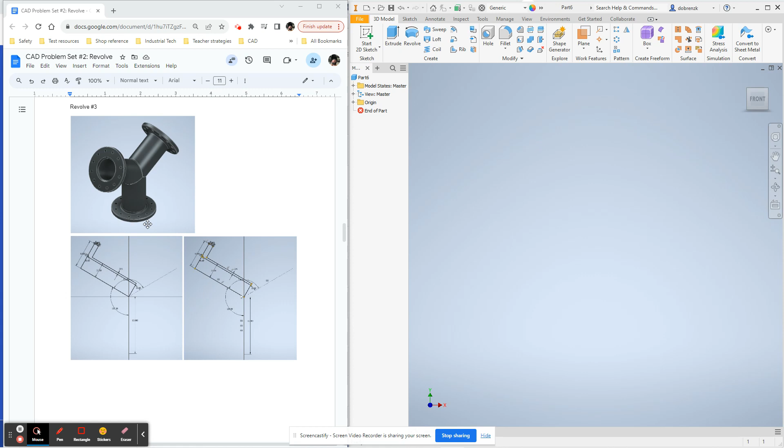This video is going to demonstrate how to create Revolve number 3 of problem set number 2, which, as you can see in the pictures on the screen here, is a 3-way pipe flange. Now we have several drawings of different sketching aspects. We have a circular pattern, some extrude cuts, another circular pattern of the 3D feature, and kind of a final

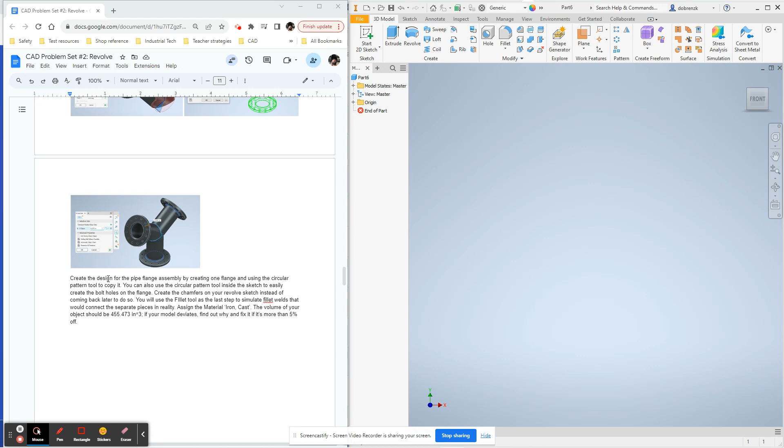fillet. Now, if we read the directions here, what we're instructed to do is create the pipe flange assembly by creating one flange and then using the circular pattern tool to copy it, which is pretty much what's shown over here. We are also to create chamfers on the Revolve sketch instead of coming back later to do so.

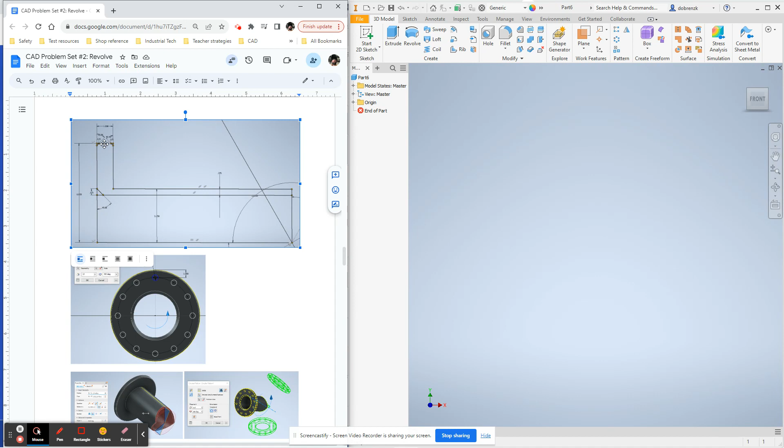So what does that mean? Let's see if we can find a better example. So here in this sketch, there is a chamfer on this face that we're going to integrate into the sketch instead of doing it later. And there's also chamfers on the corners of the flange as well. When we zoom in later, you'll probably be able to see that.

What else? Any other features we need to be aware of? Using the fillet tool is the last step, which is shown here. You can see highlighted in blue where the different fillets are, where the 3 pipes meet, and then where the pipes meet the flanges are places that we're going to do the fillet.

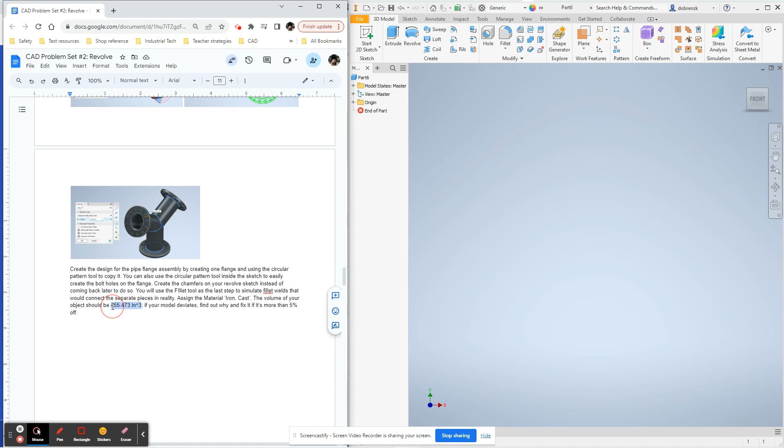Lastly, the material is going to be cast iron, and our target volume is 455.5 cubic inches. So we know we're working in inches, and this is going to be our goal. And if we get all the dimensions right, we should be spot on with this, but as long as you're within 5%, that is all the designer is asking you to do. So I'm going to zoom in here on the doc so we can get a better look at some of the detail in these sketches.

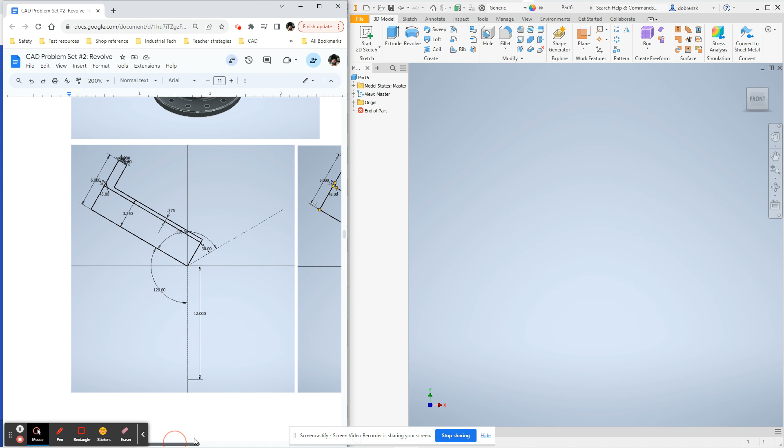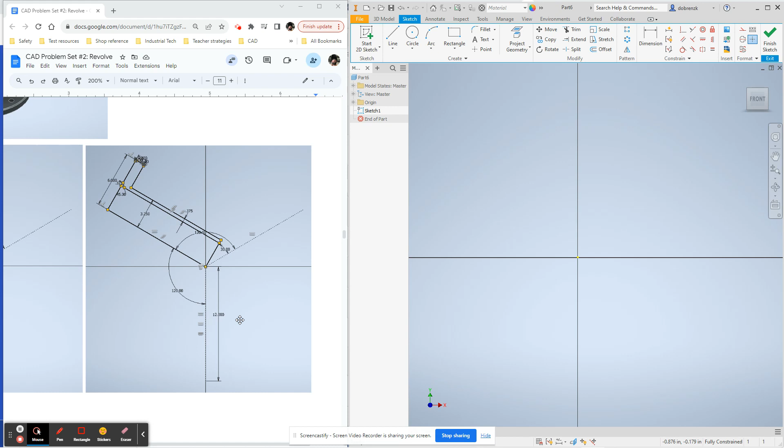All right, so we have 2 nearly identical sketches here. This one on the left has only the dimensions and the sketching aspects, and the other one has the dimensions as well as several constraints that we need to be aware of. So I'm going to go ahead and start sketching this. Okay, so our origin is right in the middle, and we have the 3 different legs emanating from that, and we have 120 degrees between each leg, and each leg is 12 inches long. Let's see, we have 2 that are construction and 1 that is solid, so I'm just going to repeat that.

Okay. And I'm just going to get them in there rough. I'm not going to worry about the length of them yet or the dimensions. That is very easy to assign afterwards. Okay, we know that that leg is going to be construction, so is this one. And we're going to assign length to this one, which is going to be 12 inches. And we're going to use equals because these 2 are the same 12 inches. So we're going to apply those 2 constraints. Zoom out a little bit. And here's our starting point.

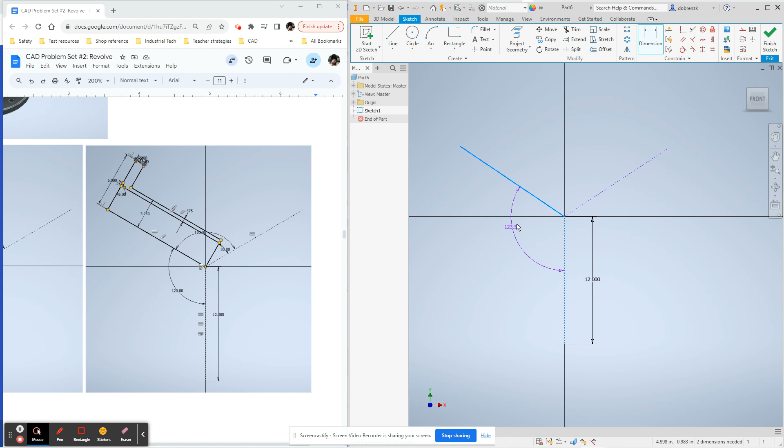The next thing that I think we should do is to assign 120 degrees between the legs or those different lines. So let's grab our dimension tool, click the 2 lines that we want to give an angle between, and enter the number that we're looking for. 120 on both of those. Now you could try to put 120 here, but the computer is going to say you can't do that. What this is telling you is basically that it already knows it is 120 right now, because the computer knows that if you take 360, a complete circle, and divide it evenly into 3 ways, that it's 120. So that's why it won't let you put it. It's already figured it out, essentially.

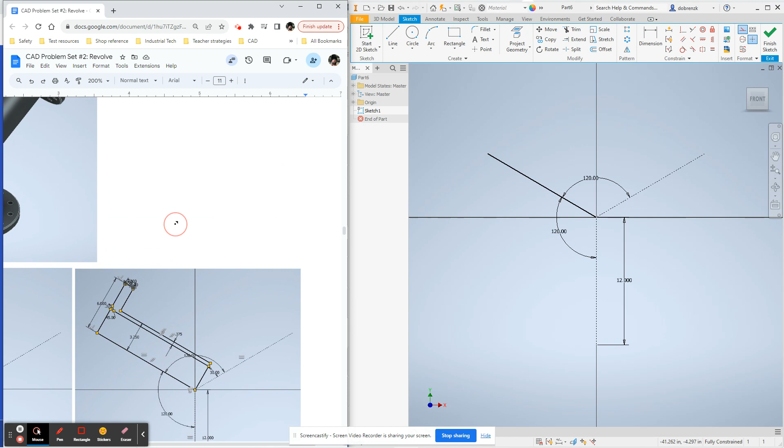All right, next we're going to look at creating the sketch for the pipe flange. Now, as this is a revolve, we essentially only have to sketch 1/2 of what the profile looks like. So that's why it kind of looks like this big L thing right here. And because we want it hollow, it's going to be essentially this outside portion, this little skinny L hockey stick looking thing, that is going to be the profile, and then this line is going to be the axis on which we're going to spin around.

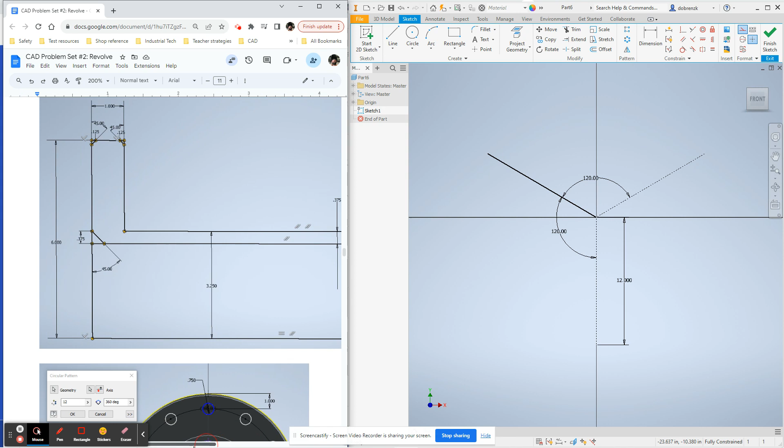I can't recall, I think there was a close-up of it here, and that's correct. So this is that little L hockey stick thing that we are going to make right now. So let's see, anything I need to be aware of here. Several dimensions, but I think I'm going to use the one on the top for now since I can see it all on one screen. Okay.

So we're going to come this way, and that's going to be perpendicular. It's going to come over, also being perpendicular to the last. And I still have construction on, so let me turn that off. It's going to come down, it's going to come over straight across here to here, and then come back to

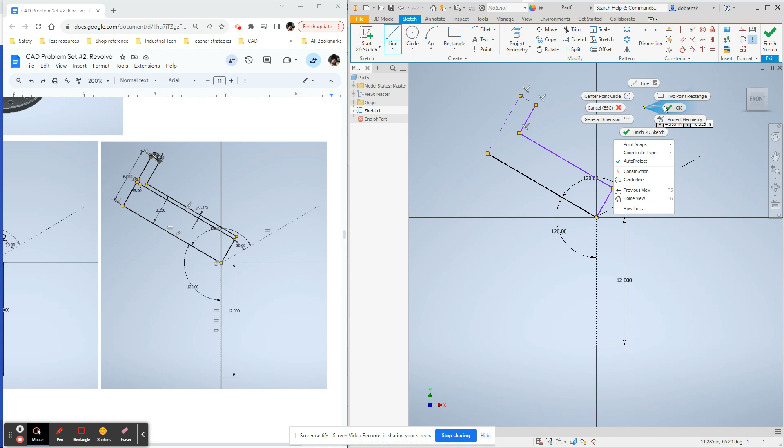the origin. Now I still have some lines that I made construction by accident, but I can just highlight both of those and click the construction. The construction tool is always just a toggle off and on, so I can always make something construction that wasn't, or vice versa.

Next, there's a line that's going to go from here to here, and this one is actually going to be parallel to the existing line, so that's an easy one to do. And since I have that tool out, I could say those two have to be parallel also. And now I have a few dimensions I'm going to have to put in here. So let's go ahead and apply those dimensions. So we know this is going to be 6 inches between here and the wall thickness is 0.375 or 3/8 of an inch.

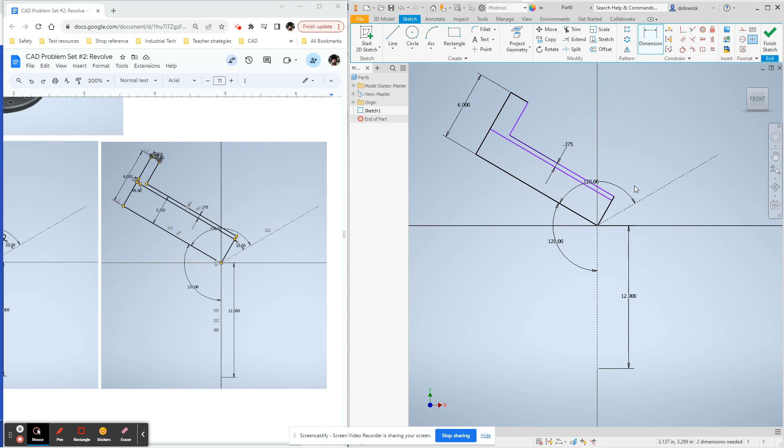What else do I know? I have a dimension here, 30 degrees between these two lines. Oh, and because I made these perpendicular, I already knew that. If I was dead set on creating exactly that same drawing, and I said, no, I really want to put that angle in, I could delete that perpendicular and then I can put in the 30 degrees. Essentially, they're doing the same thing. There's just different ways of doing it.

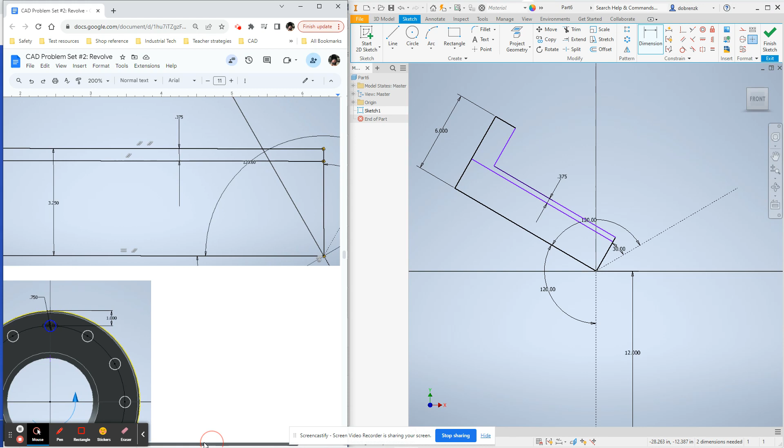Okay, I'm going to go down to where there's more detail now. And let's see what we're missing here. Okay, so I have 2 small triangles in the corner here, which I can just take this line and go point to point. Okay. And I can give a dimension to both of those. Where it said this was 45. I can do the same thing on the other side. And 45 degrees is what a chamfer normally is, 45 degrees.

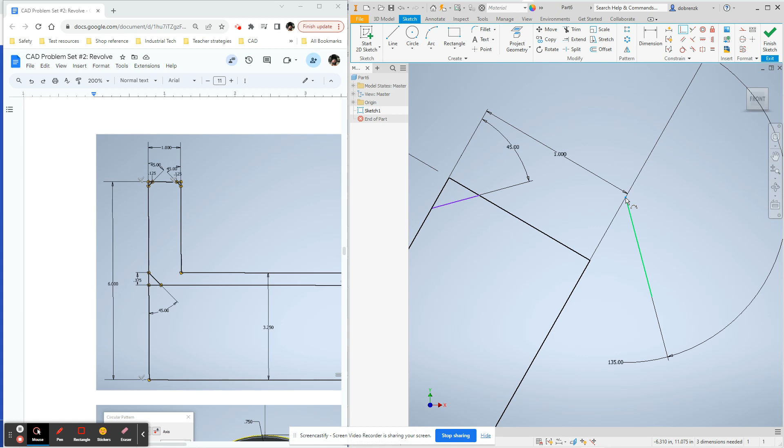Let me get rid of that guy. It's just not letting me do 45 there. Okay, 45, 45. And then we also, very importantly, have a dimension here of 1 inch. Oh, looks like I thought these were connected, but they were not. So I can take the coincident tool and make sure it knows where it's supposed to be. I think I lost it. Where'd it go? All right, so I have to do it a different way. Let's see. Oh, there it goes. A little bit out of place. So what happened was this point did not know it's supposed to be on that line or something like that.

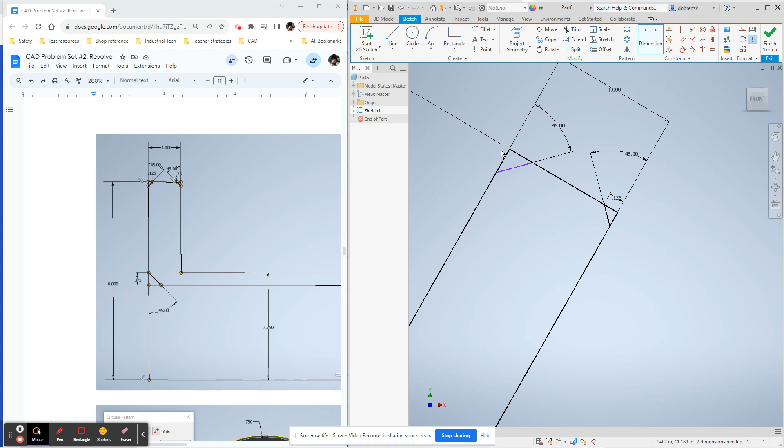Okay, well, I guess I should put in the other dimensions given. So there's also a 0.125 distance between this point and this line. So if you put that in, that should be all the information necessary to make that section fully constrained. As you can see, it goes black, telling me that's all the information I need.

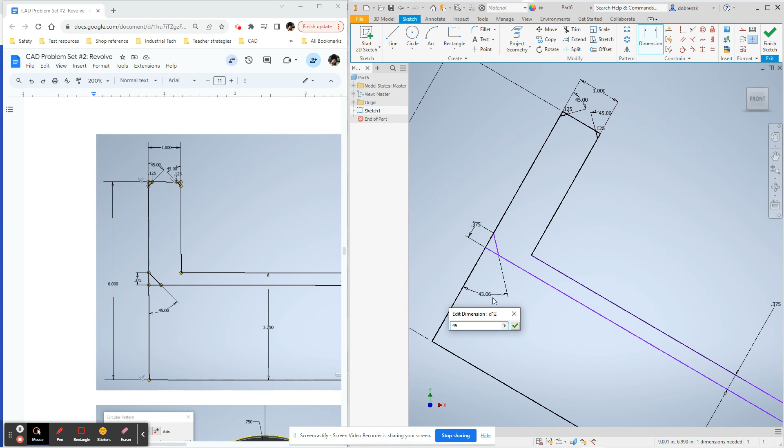I do have one more larger chamfer in this section here, kind of the inside of the pipe. So I'm going to do the same thing. I have this dimension of 0.375 inches. And I also have this angular dimension of 45 degrees. Okay, let's see what's left here. I need this 3.25. And after that, I'm fully constrained. So that's all the information I need at this point to go ahead and do my revolve.

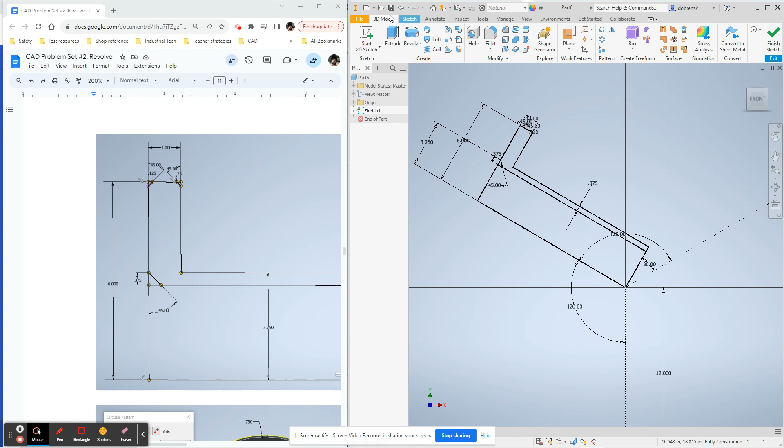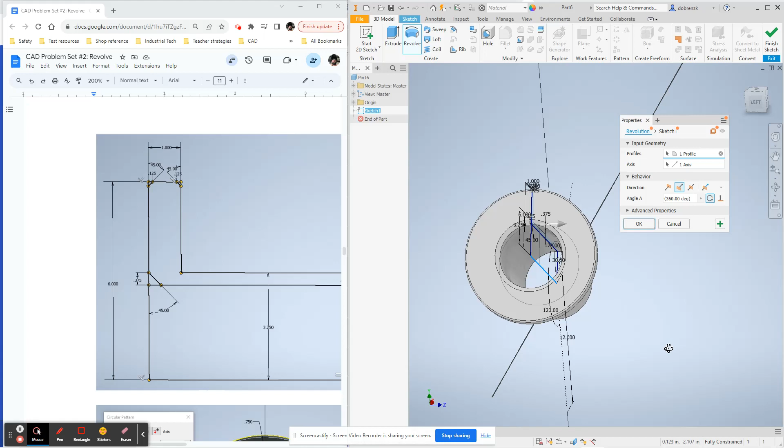So I'm going to grab my revolve tool in the 3D menu. And we are only going to do this section that looks like the hockey stick. And you'll see why after we revolve it. We're going to do 360 degrees. And our axis is going to be here. And that is the preview of what 1/3 of our flange is going to look like. So that looks good to me. Let's go ahead and do that.

Now at this point, before I replicate this into 3, I am going to cut all those holes that we see on the flange here on this step. So what we're going to do is use the circular pattern tool. So I'm going to draw a sketch on this face, and I can see that this circle lines up with the axis. So that's what I'm going to do. I'm going to put a circle here, and I'm going to tell it that it has to stay above the origin. I'm also going to give it the diameter of 0.75 inches.

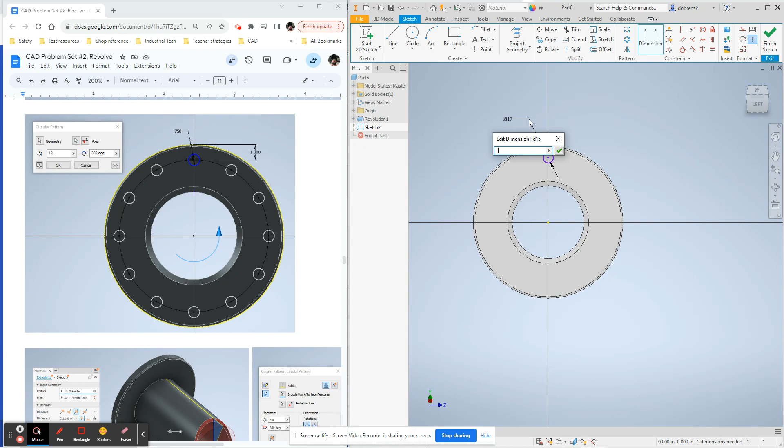And there's a dimension here that says from the very outer edge of the circle, so from this edge to the center point of the hole, it is 1 inch. But wait a minute, what's going on here? It's not letting me reference that edge. So if it's not letting you reference the edge, what you have to do is take a point and put a point there.

Now that point will probably wander around because it's still on the circle. So I'm going to have to use the same vertical tool and tell it it has to stay above the origin, or I could have used that center point as well. Now that I have that point there, I can use that point as a reference for that 1 inch dimension.

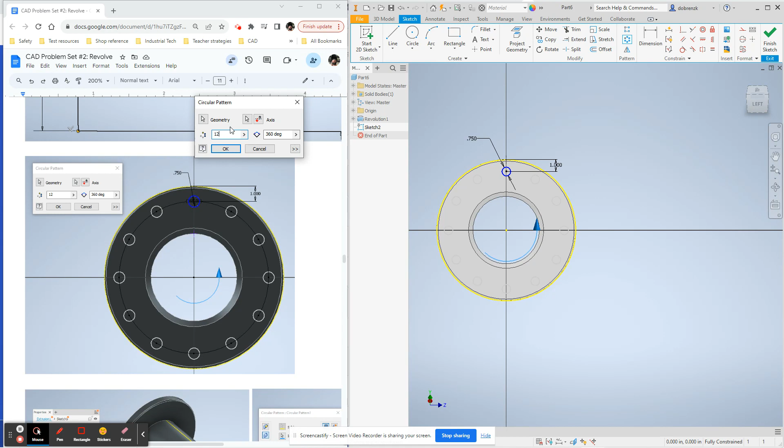And now since that's fully constrained, now is a good time to go ahead and use the circular pattern tool. It asks for geometry, which is the circle that I want to repeat, and then it asks for the axis, which is going to be this, and then how many times I want to repeat it, which is 12. And you can see the preview, hit OK, and there's your holes.

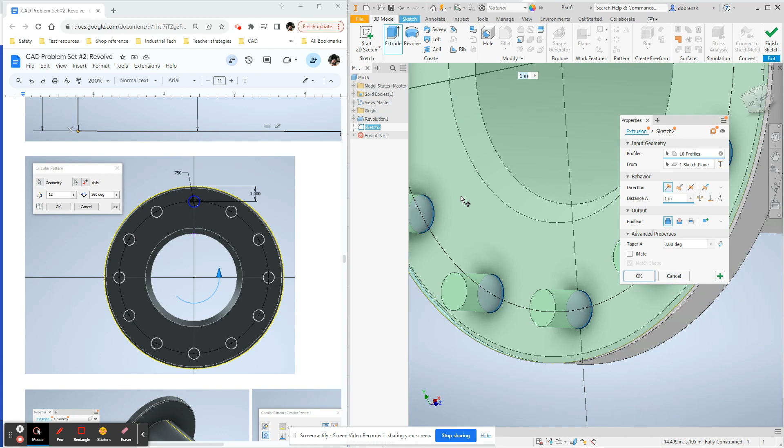Now I can just use the extrude tool and select those holes. Soon to be holes. They're not holes quite yet, are they? Right now we're just selecting circles. Nope. I selected one too many. Let me unselect this. Alright, we gotta start over.

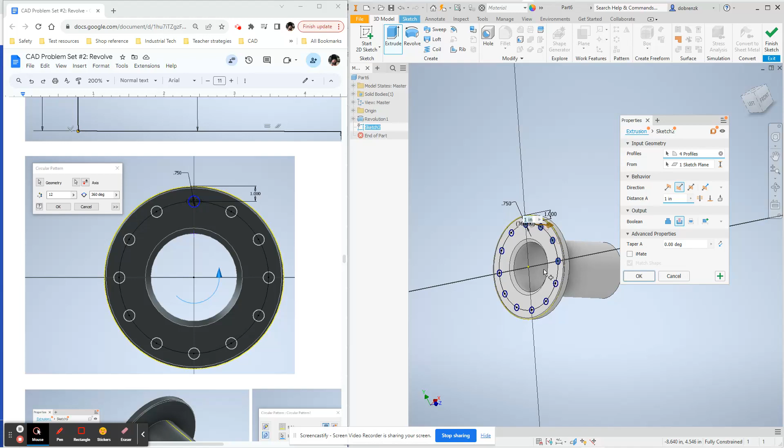This time I'm just gonna hit the cut button to start with. And you can see I have a different preview of the cut. Pick the disc again, gosh darn it. Alright, since I keep having trouble with that, what I'm going to do is I'm going to take that outer edge that's making it enclosed, go back to sketch and unenclose it. Now it won't let me pick that whole disc when I go to the extrude tool.

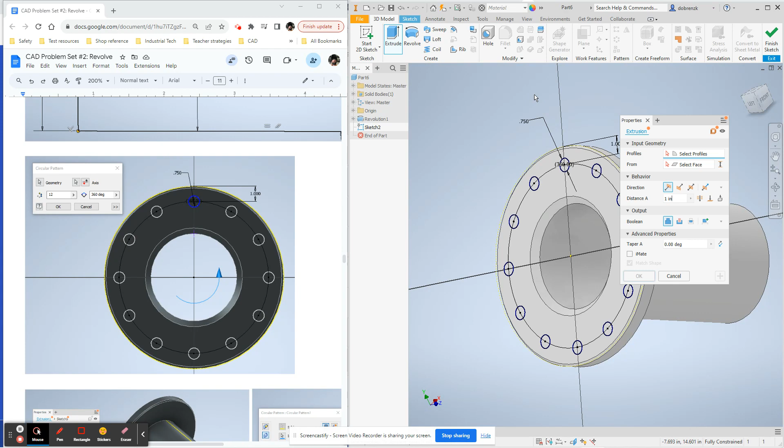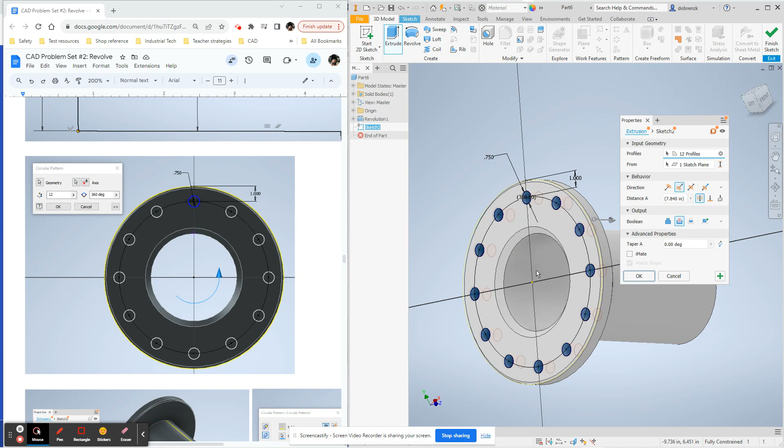Arguably a little bit easier because I can't click the wrong thing now. But since I didn't erase that circle, it doesn't destroy my geometry or other references. Alright, now we'll go to cut. You can see the preview is cutting 1 inch deep. If that's enough, that's great. If not, maybe we need to cut deeper or just tell it to go through all. Now we have the holes on the flange.

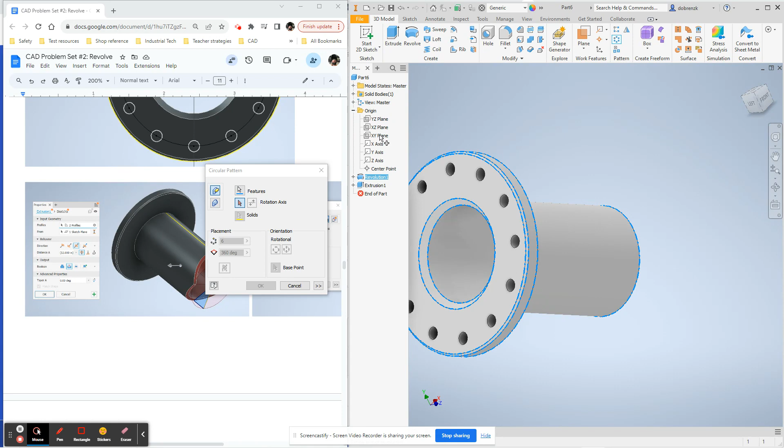Now at this point, it seems like we're nearly ready to do the circular pattern. And we're going to use the same circular pattern tool, but this one is going to be in the 3D menu. We select our feature, select our rotation. You're going to use probably the Z origin axis, I'm guessing. I'm going to put 3 of them, and now we have them all joined.

So at this point, all I'd have to do is go to Tools, select the iron, but there's one more step which I want you to do. And I would like you guys to figure this one out by yourself. It's a good little problem to solve. So for this extrusion step, what we have to do is cut these pipes so that they can fit together.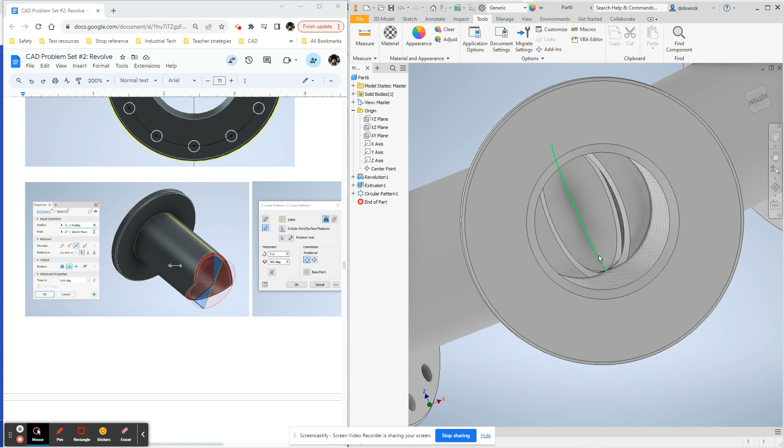And the reason there's a problem now is we have all this extra material inside the pipe because we essentially made them straight. So we want to cut these pieces away so that it flows. If this were real pipe, the flow would be greatly inhibited by all these. So I want you to figure out how to cut these so that this isn't the case. What you can do is you can roll this last step back.

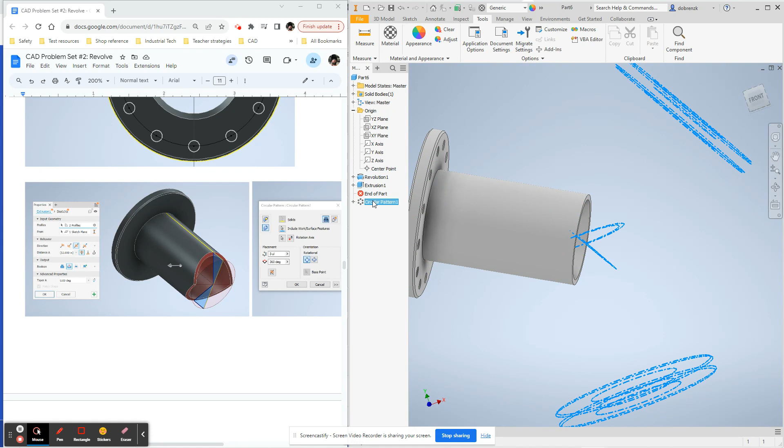And essentially what we want to do is do some type of a miter cut on these, an angled cut, so that it looks like this, and we have a perfect joint when it's all said and done. So it doesn't look any different than it did with the pattern. Because at this point, you can easily put the fillet tool on these different joints as if it were welded together like what generally happens in real life. All right, that is object number 3.